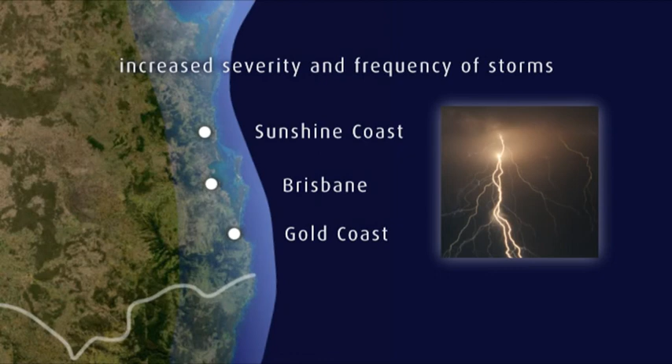The Intergovernmental Panel on Climate Change, or IPCC, Fourth Assessment Report, Climate Change Impacts, Adaptation and Vulnerability 2007, singles out Southeast Queensland's vulnerability to water security problems. It specifies that our coastal settlements will experience increased severity and frequency of storms, whilst our inland areas will experience less precipitation and increased evaporation.

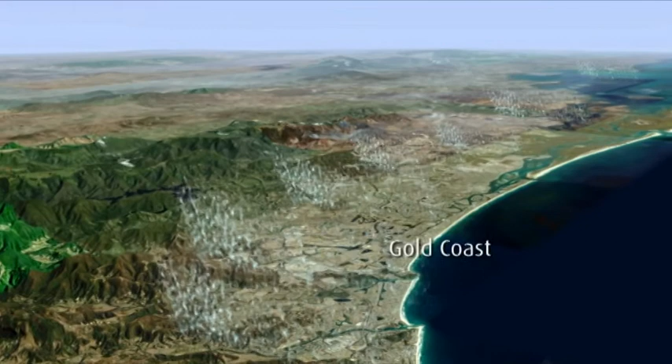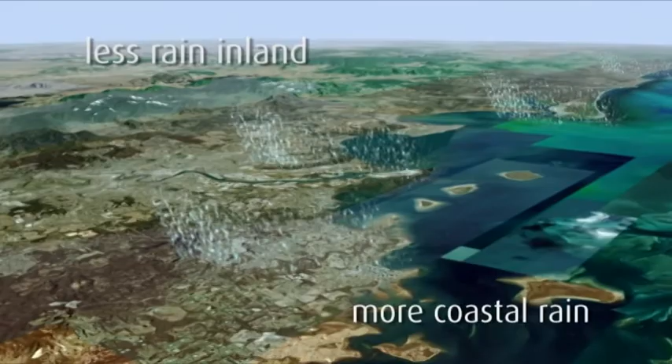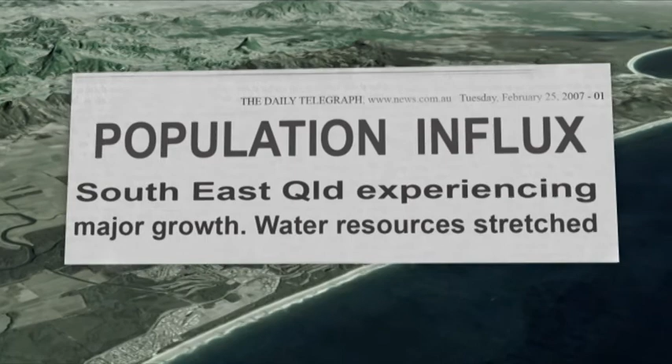Whilst we hear much about the drought, the reality is that our climate is changing, and so are our rainfall patterns. Less rain is falling inland, while more is falling in the developed coastal areas. Our dams are empty, and there is public outcry against building more. But when it does rain, our stormwater systems are overflowing. In addition to this, the Southeast is experiencing major population increases, which are dangerously straining our already weak water supplies.

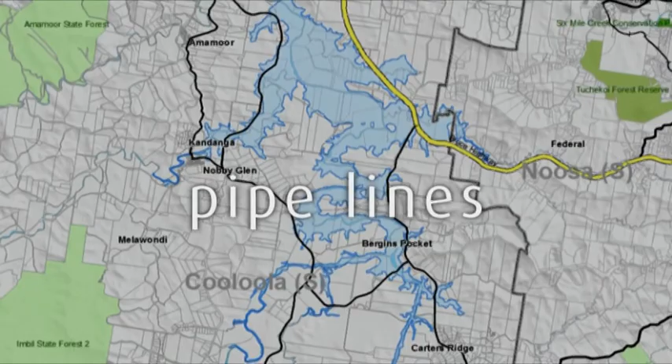Traditionally, we would adapt by constructing new dams and pipelines. However, these measures are becoming increasingly unpopular due to environmental and social impacts. There is also considerable concern that these measures may not solve the water scarcity problem.

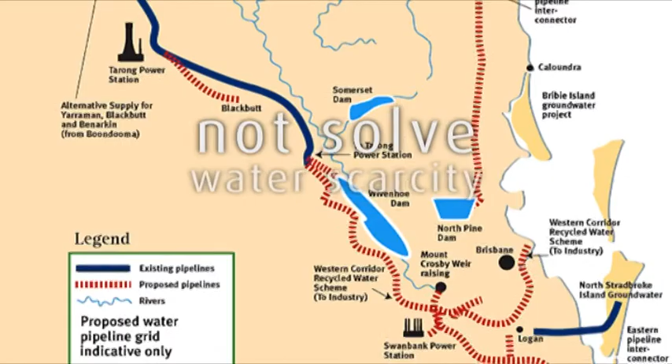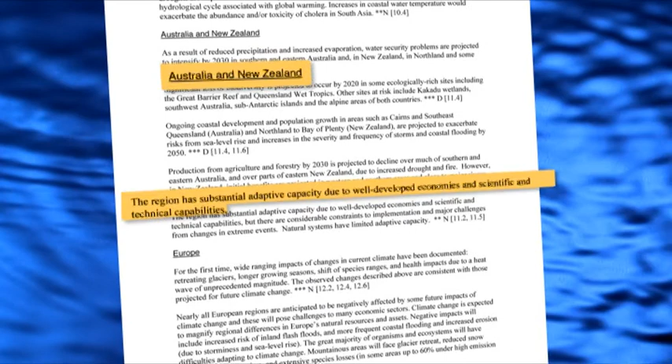The IPCC report points out that our region has substantial adaptive capacity due to well-developed economy, science and technological capabilities. Today's presentation outlines how FKP Developments and Maroochy Shire Council have joined forces with leading environmental scientists and engineers to understand, adapt and overcome water scarcity.

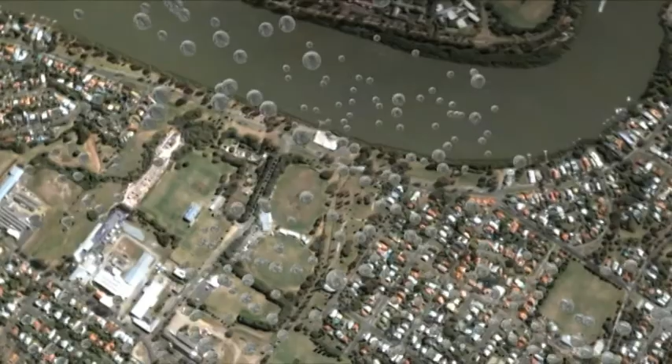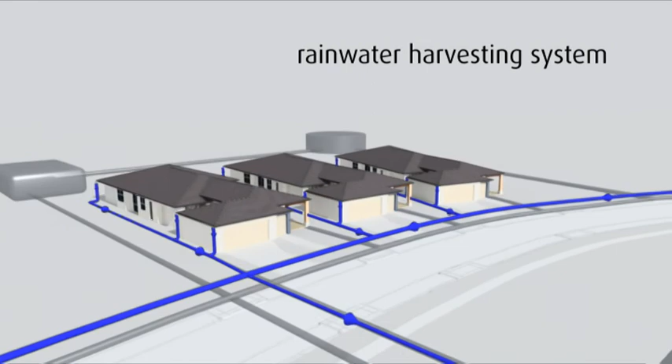By adapting the urban form to climate change, they have created an opportunity for water supply via the urban catchment. This technological breakthrough will, when combined with purified recycled water and water-efficient appliances, reduce demand on local authority water supply by 75% to only 90 litres per person per day.

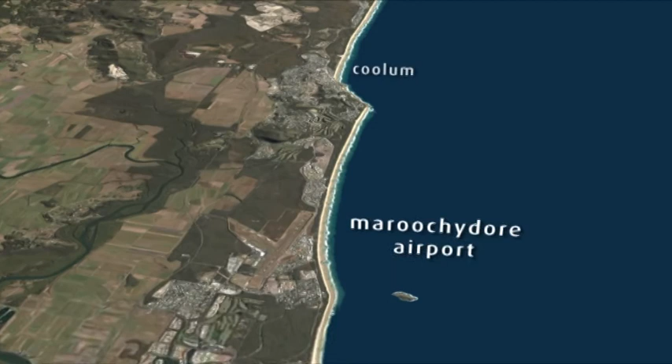Coolum Ridges is a 1,300-lot urban residential community on the Sunshine Coast. Maroochy Shire and FKP Developments are working together to provide an innovative outcome in terms of satisfying the water needs of the future community.

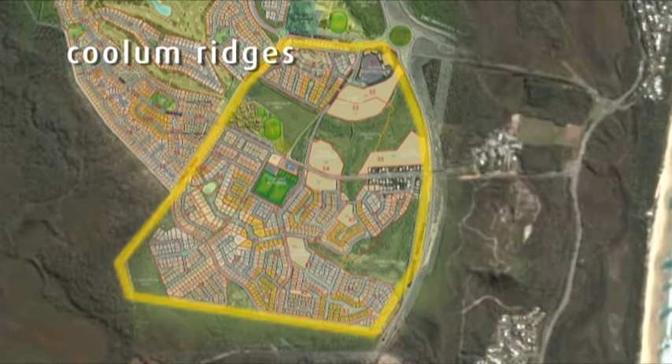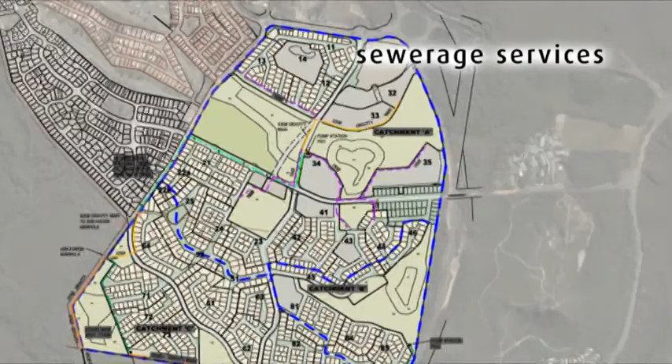The proposed integrated water cycle system for Coolum Ridges involves the provision of standard reticulated water and sewerage services to each urban residential property. However, in addition to these traditional first and second pipe systems, two other supplementary water supply schemes are proposed, being dual reticulation and rainwater harvesting, and together they provide the diversity of water sources necessary to manage climatic risk. It is a 21st century solution to a major problem.

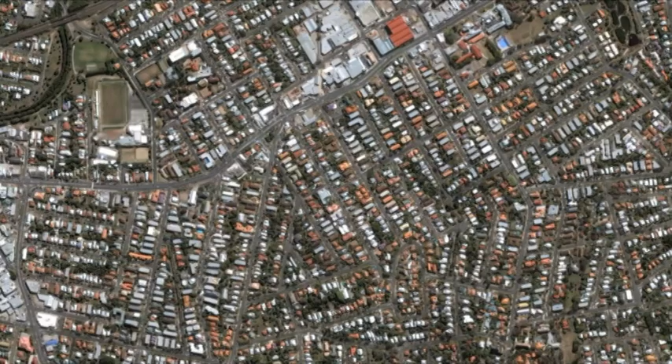Over the next 20 years, an additional 320,000 homes are planned for the Southeast. That's more than 14,500 new homes every year, draining our already strained water supplies.

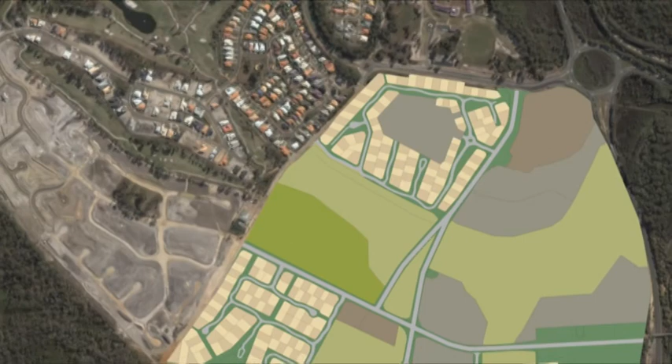The Coolum Ridges Water Security Strategy has been independently confirmed as a method which, if implemented on only 70% of all new greenfield developments, would deliver water savings of 6,000 million litres every year by 2010. This would steadily increase every year, achieving water savings of 20,000 million litres by 2017 and 41,000 million litres by 2026.

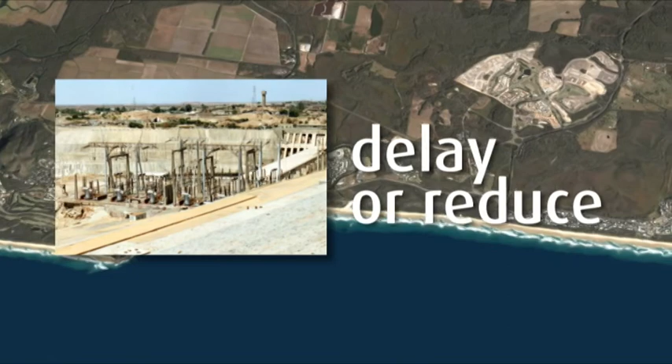Broad-scale adoption of this method throughout Southeast Queensland has the potential to reduce pressure on municipal supplies to such a degree that it may delay or reduce the need for constructing new dams. The introduction of initiatives such as this introduces largely non-climatically dependent sources of supply to Southeast Queensland's water resources that improve the overall sustainability of regional water resources.

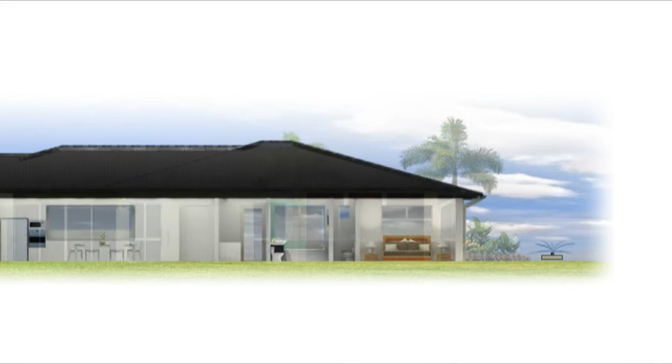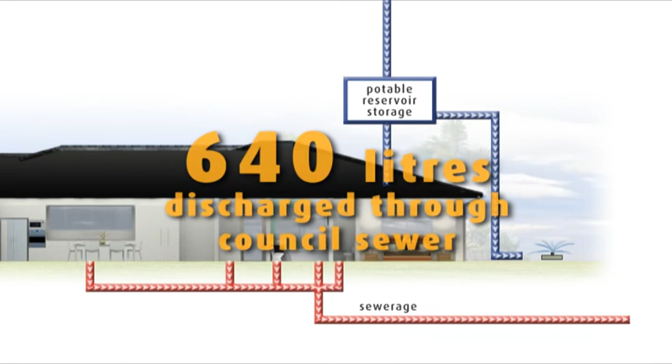Typical household water cycle: current figures indicate that a typical household requires approximately 1,120 litres of water per day, of which approximately 640 litres is discharged through council sewer. Water cycle with household rainwater storage.

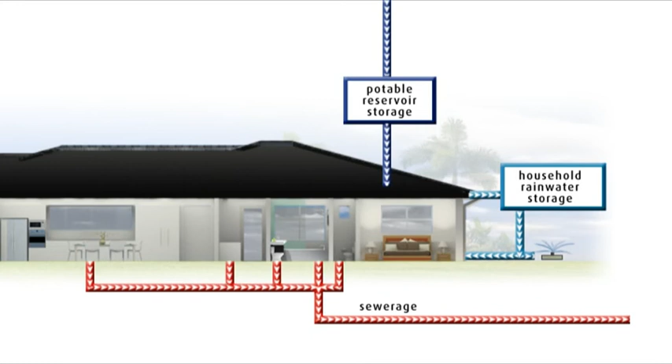When a 15,000 litre rainwater tank is introduced for use in toilet flushing and irrigation, the total water supply from Council is reduced to approximately 480 litres per day, or 150 litres per person.

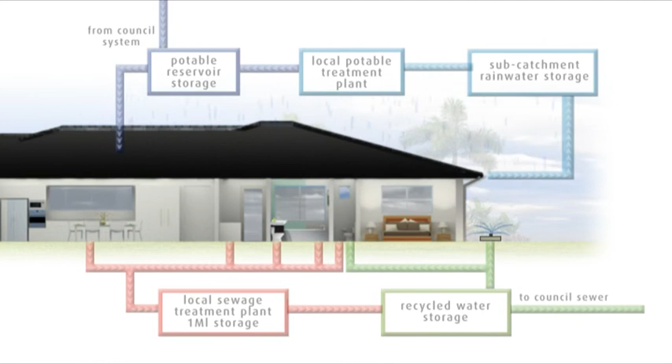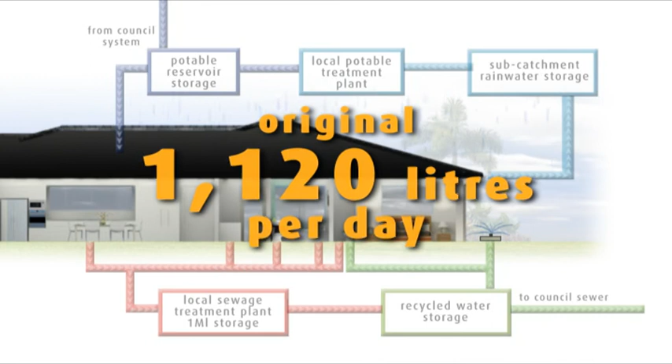Integrated household water cycle. However, it is when we can introduce the two other supplementary water supply schemes, being rainwater harvesting of roof water combined with reticulating purified recycled water for garden watering and toilet flushing purposes, that we estimate a reduction on demand of council potable water supply to only 240 litres per day, a dramatic improvement from the original 1,120 litres per day demand. This equates to only 90 litres per person per day being drawn from the municipal supply.

Allow us to explain this process further.

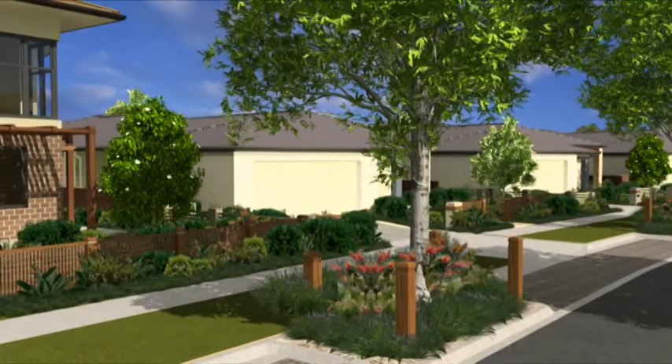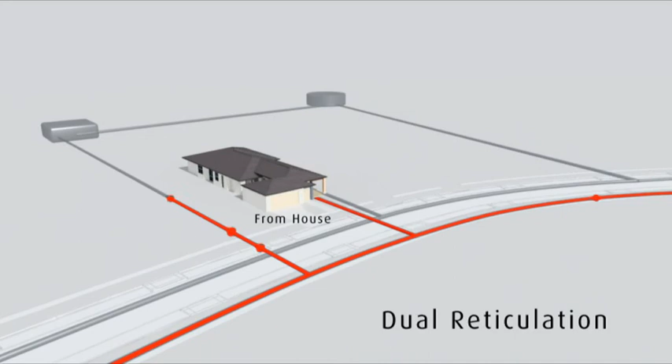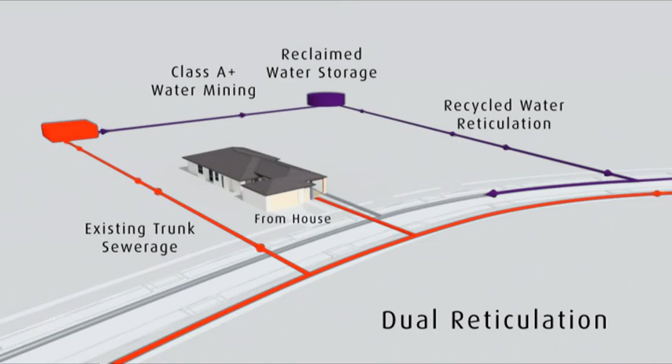Dual reticulation. The intention is to provide a dual reticulation scheme to the estate. This would entail extracting wastewater, that is, water mining, from the existing system and purifying the water using a membrane bioreactor to the required Class A+ standard, and then reticulating this purified recycled water throughout the estate for garden watering and toilet flushing purposes. Each property would be provided with a metered purified recycled water connection.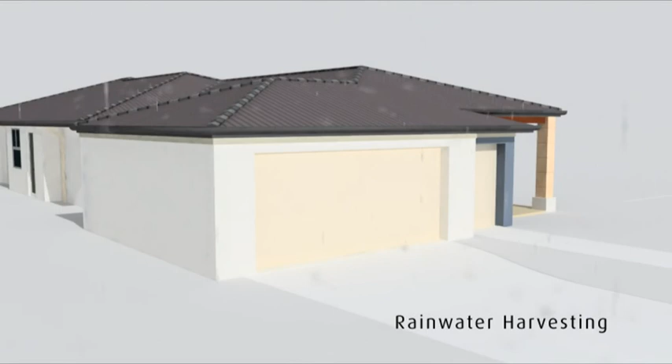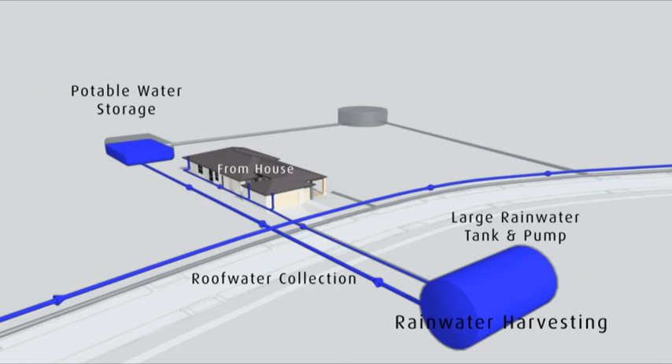Rainwater harvesting. The second scheme proposed is a truly innovative plan to harvest and collect roof water from each house in the estate. Collected roof water would be piped to one of several large communal rainwater tanks located within the estate. Water in these tanks would then be pumped to a larger reservoir and treated using membrane filtration and UV disinfection processes to a potable standard.

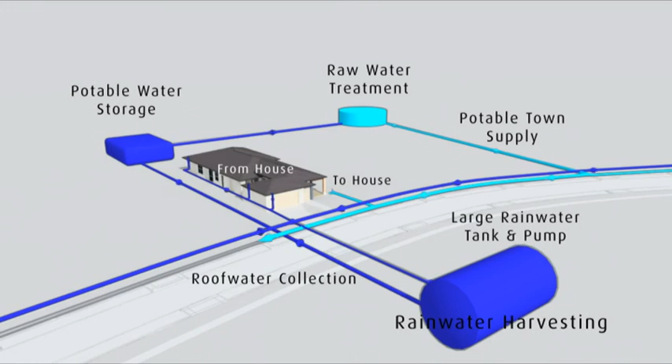It is estimated that the addition of these two supplementary sources of supply will reduce the annual demand on Council's existing potable supply system by up to 75%. From a bulk water supply perspective, this system will save 370 million litres of drinking water per annum.

Of particular note is the innovative rainwater harvesting system. The intention of this system is to harvest stormwater, in this case roof water, for treatment to potable standard and injection into the town supply network. This proposal will ensure that at no time will the residents ever be drinking purified recycled water. It is a scheme of national significance, demonstrating the use of harvested rooftop stormwater as a direct source of potable supply.

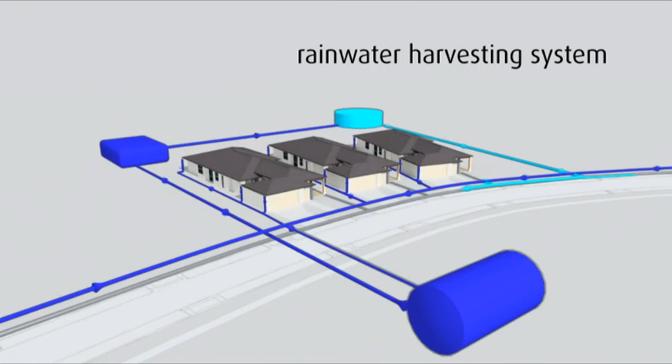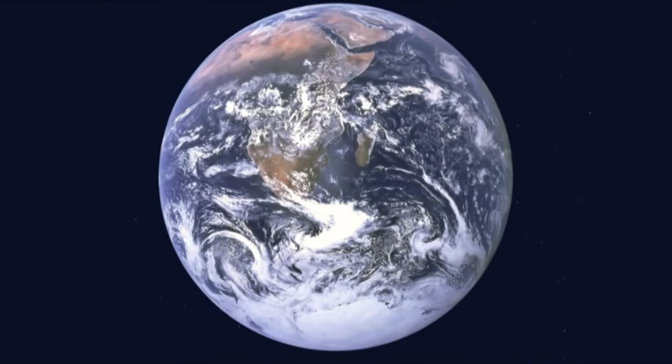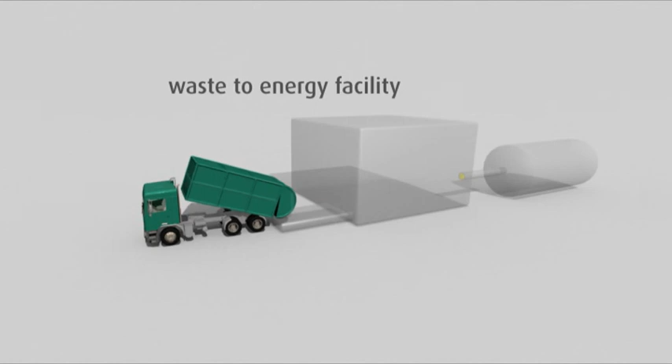In addition to providing a solution to water scarcity, the project is tackling the issue of greenhouse gas reduction. Residents will be provided with a third wheelie bin for all household biodegradable waste, such as kitchen scraps and garden clippings. This third bin will be collected from the household and transported to the on-site waste-to-energy facility for conversion into renewable fuel for use in cars in the form of compressed natural gas.

350 cars per week will fill their tanks with renewable energy and in so doing save 800 tonnes of carbon dioxide per annum. This is roughly equivalent to the amount of carbon dioxide that 160 hectares of Amazonian rainforest would absorb in a year. In addition to this, the facility will divert 15 tonnes of organic waste from landfill every day.

The facility will produce around 3 tonnes of high-quality compost. This compost will be used to plant biodiversity-friendly trees, which over the life of the scheme will absorb an additional 34,000 tonnes of carbon dioxide.

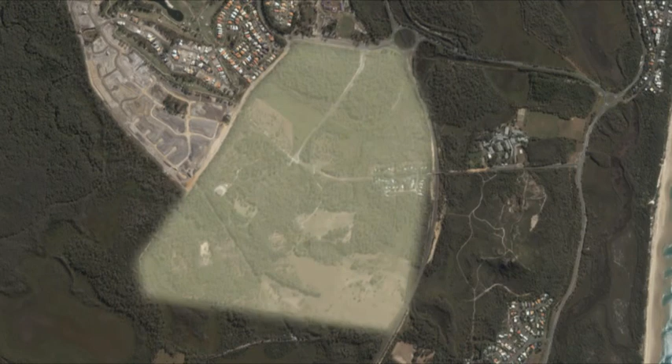For the past 12 months, extensive engineering, environmental and financial modelling has been undertaken between FKP and Maroochy Shire Council with regard to the implementation realities for this scheme on the Coolum Ridges project.

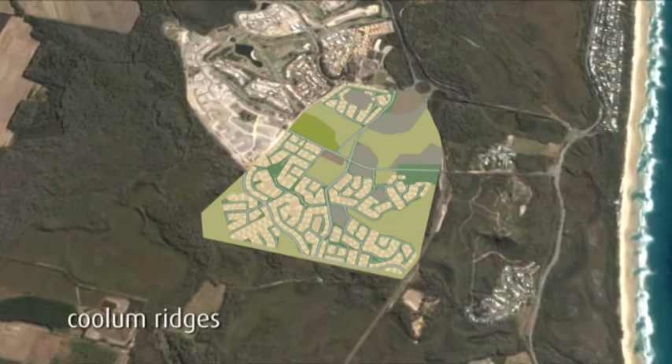This project will deliver groundbreaking results. It practically demonstrates a strategy which, if applied to all new urban developments, would dramatically improve Southeast Queensland's water security, whilst also taking the lead on greenhouse gas abatement.

We now seek the support of government at all levels to assist Maroochy Shire Council achieve this outstanding result.